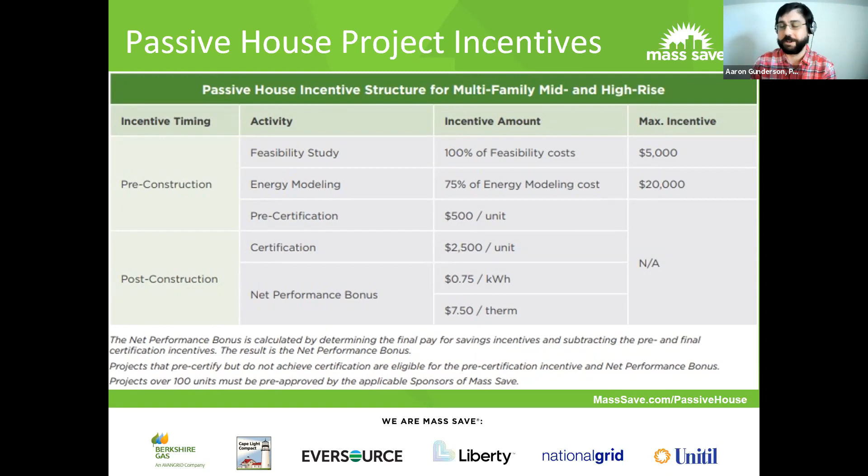We're really excited to see the growth in multifamily. The reality is a lot of these multifamily units are also affordable projects. That's where we've seen a lot of this growth, so it's not just market rate — we're seeing a lot of affordable projects go through this as well.

In addition to these incentives through Mass Save, there's been a lot of other movement with Passive House around the state. I want to highlight a few things of where we're seeing Passive House show up. The first one is at the state level through their affordable housing financing — I'll actually mention this on a separate slide, so I'll skip over that for a moment.

On the local level, we've seen a few different cities incorporate this. Boston has included Passive House in their new design standards — the Department of Neighborhood Development has included it as a method for large buildings to meet their zero emission building standards. Somerville is including it in a zoning ordinance, so Passive House actually qualifies for density bonuses in some areas of the city. Cambridge included it in a zoning ordinance as well, as an alternative pathway.

In Newton, we've seen it involved in a few ways. Their climate action plan at the town level incorporated it, and we've seen a local community group really push it. We've also seen large market rate projects like Northland, which is going to include some affordable units as well, really get excited about this and go for Passive House, in large part because of the way the city's been pushing it.

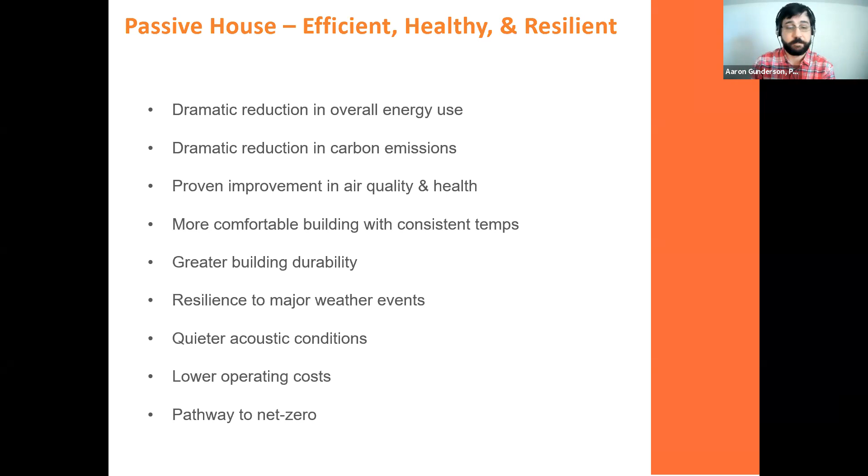This leads into what Passive House Massachusetts is working on right now. Over this year, we've been focused on a campaign promoting Passive House plus renewables equals net zero energy. This is all around framing the work the state's doing to develop this net zero code, to make sure we understand that we can't simply get to net zero with renewables alone. We don't have enough space for all the renewable energy it takes for typical buildings to become net zero. So by focusing on Passive House, by focusing on that energy reduction first that Passive House achieves, it allows us to get to that net zero energy that's so critical for the state's climate goals.

We're focusing on this at our monthly presentations. Many of you have been to them. They're the second Tuesday of every month. Our next one is coming up in July, and it'll also keep building on this theme. So feel free to keep attending those.

Lastly, I want to hit on a little bit of cost. I want to give a shout out to Beverly Craig from MassCEC, who just sent me this slide before the presentation, so thank you, and I was able to include it. This is going over Philadelphia, in Pennsylvania, where they have that QAP process, and they had this huge growth in passive house building.

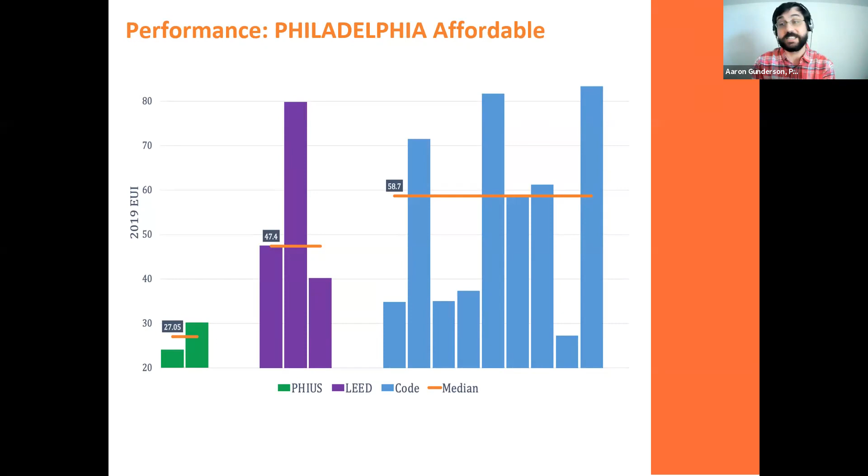We're able to see it actually happen. Many of you have seen the cost slides from these projects in Philadelphia and Pennsylvania, where the costs are about even, if not 1 to 2% more for the affordable projects, but really close to being even. And we're seeing that shape out to be, not even in performance, but a huge reduction in passive house for performance. So this is fantastic. This is what we want to see in Massachusetts, and why this presentation, all of you here, is so critical.

Lastly, I'll mention our video library, where we have a lot of great content. One of those sessions you may want to watch is this Affordable Housing Design Manual done by Tim McDonald from Onion Flats, who was responsible for a lot of those Philadelphia projects we just saw the cost and performance comparison of. So check out this session and a lot of others on our video library to get more information after today. But that's all I have.

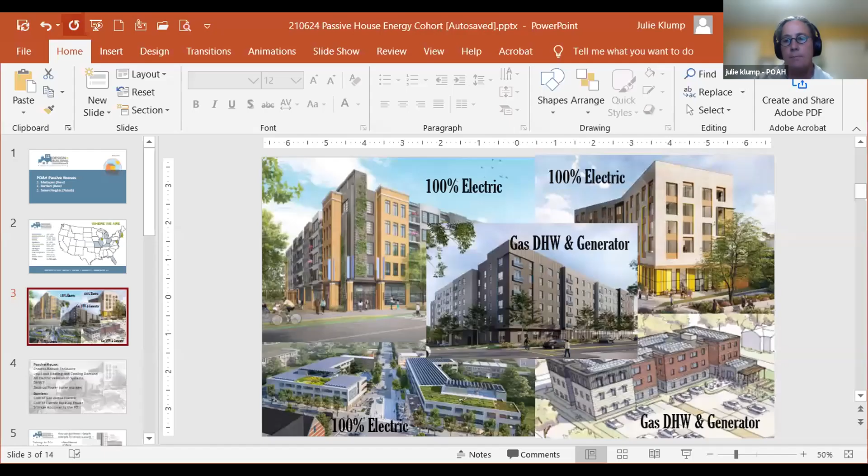Hi, everybody. Nice to be here, coming to you live from West Texas. It's almost 100 degrees out there. I don't know what it is there, but nice and toasty here.

I could talk about passive house all day. It just seems like the obvious way to build now that we've figured it out. I want to touch on how we finally got in the ground with the project, and highlight how we're keeping up with things as we're starting construction. Michelle's going to touch on a little bit of that in construction. Bartlett, I want to highlight, is our first shot at being all electric, with some challenges we're facing with one of the systems we're trying to put in place there. And then Salem Heights, which is a near passive house deep energy retrofit. I want to highlight some of this, and hopefully it's a little inspiration, and maybe it'll kick off some good dialogue about what folks are thinking about in passive house.

You might have to click on my slides. Yeah, you might have to click on your slide again. Like, actually. There we go. Mouse. There we go.

So I know we're talking about Massachusetts. I just want to throw out there, this is where POAH has projects. The green states have passive house buildings. In Massachusetts alone, we have the project I'm going to touch on briefly under construction. We have 2 starting this summer, committed to passive house, and then we have 2 starting design. So we'll have 5 projects underway in the next year or so in Massachusetts.

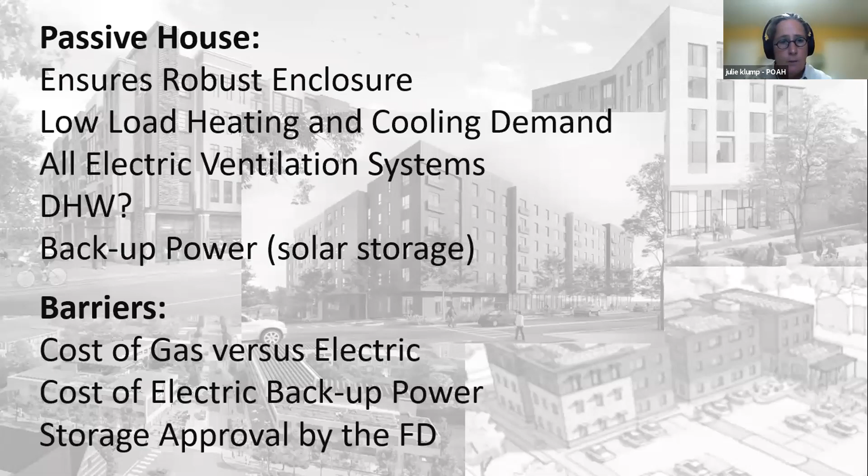So the way that we got to being in the ground on a project, we took it really slow and felt like what we needed to do was to really spend a lot of time. We brought a GC on early for pre-construction. We did enclosure training, estimating training, mechanical training. And this was not only for engineers and architects, because not everybody is up to speed as maybe Icon in terms of designing these buildings, but there are things we had to demystify. So the mechanical subs, they see per floor ERVs, and it's not something they're used to.

So the cost goes up $1 million. And then when we explain to them that we've gotten rid of all the vertical shafts and shrunk the ductwork because it doesn't have to travel as far, then it goes back down $1 million. So there were just some real key points during our training that we could really see.

And we spent a lot of time looking at numbers and pricing different things. What came of all that training was that we just needed to explain to people what we were doing, that it was still an enclosure, still a window. The training also highlighted things that made building the building better and easier, even though the sequence changed—that's been one of the big lessons for us starting construction, having to do things in a little bit different sequence, which is only just a learning exercise for the GC.

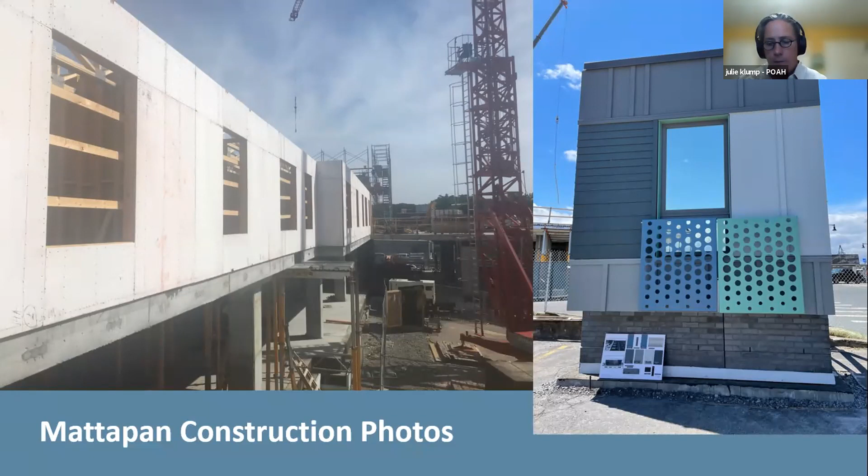So this project is one that should start this summer. It's 55 units, senior-ish, 55 plus—which makes me feel kind of old—and it's all electric. It's our first shot at all electric in Boston.

We've got a fantastic design for solar storage backup. We've got a 90 kW PV array. The other thing is we need probably 150, maybe 160 kW of production, so we're going to be short. We're going to research how to use some offsite capacity in order to bring this building to net zero. We haven't gotten into those details yet.

We don't know if that's something we'll be able to afford to do, but at least we know that if we can get to all electric, it'll help our decarbonization strategies and also give us a real model for the best way to buy offsite in order to fill that gap. The interesting thing is when we were all gung-ho about our solar storage system...

Our construction person sent an email—because we had our building permit submitted to the city—saying we wanted to bring this up, that we'd really like to do this instead of the fossil fuel generator. And her phone started ringing off the wall. She finally took a call, and she couldn't keep up with the notes and all the concerns.

A lot of these concerns are valid, but unfortunately a lot of them were based on a video on YouTube that showed some battery burning, and I don't know if it caused a lot of damage. Anyway, these are some of their concerns, and you can see it has a lot to do with safety. The image of the battery within this container—it actually has its own fire protection system. So there are a lot of ways we're going to be able to allay their concerns.

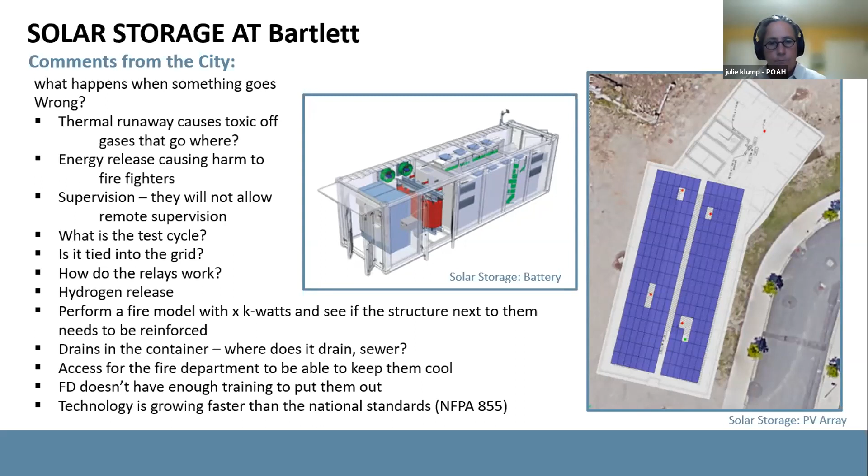And then this is a retrofit that we're doing. This is 2 10-story towers. It'll be 283 units. We're going to take over a couple units and do some better amenity space. This is Icon working with us on this.

Initially, we thought we were going to reattach all this brick that, when it was built in the early 70s, code allowed to be supported from the ground up on itself. So there's no relieving angles, no control joints. When we started to dig in and do some openings in the brick, we realized the brick ties, the very infrequent ones tying it back to the structure, were galvanized and not installed at all. So we had to take the brick down, which is fortunate for the design and building performance team at POAH, because we get a chance to really beef up this enclosure.

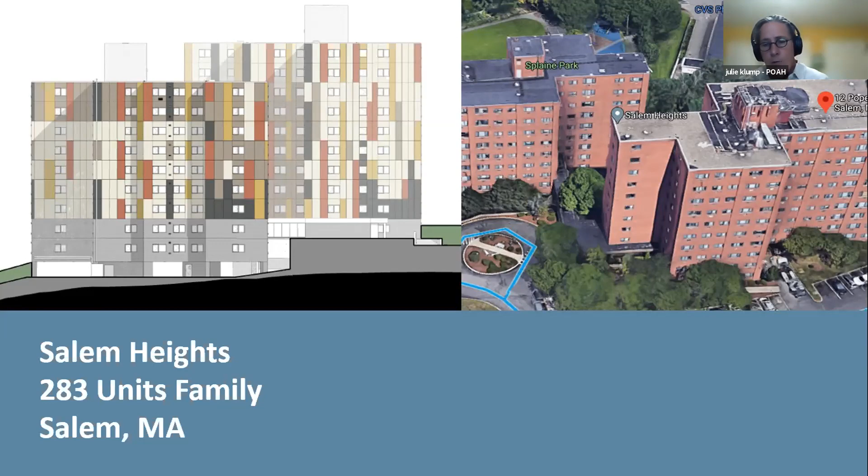So the brick's coming off. You can see on the far right, that's the existing enclosure. It's a metal stud wall with bad insulation, sheathing, and brick attached or not.

In the middle, we're using Armorwall, which is a structural insulated panel, not unlike ZIP, but it has all the fire ratings we need for a high rise. It also allows for a thermally broken cladding attachment, and we're going to use metal cladding on this building. We're buying a really good window, and we're putting 6 inches of insulation on the roof. So excited about this one.

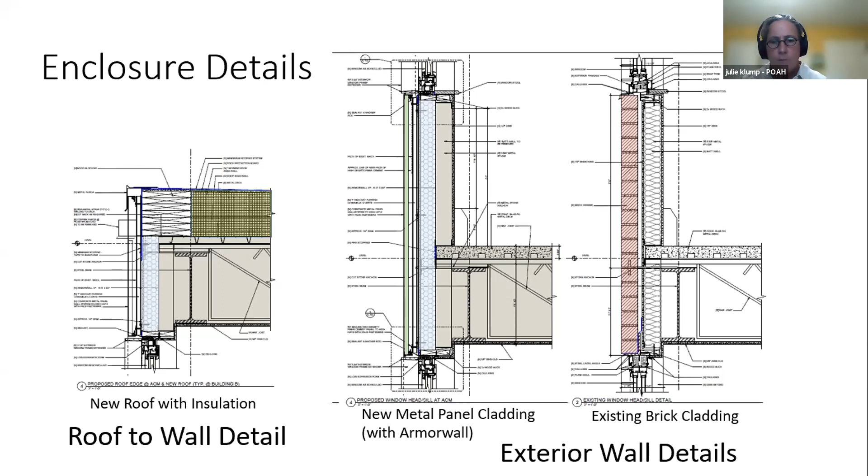Struggling right now with trying to figure out how to do blower door tests. We have some ideas on doing 3 floors, so we can really isolate a floor. That gets us maybe 50 units. But it's about how do we balance the incentives we think we should get to help offset a very expensive project, but very worthwhile in terms of getting this project up to speed in energy efficiency and good indoor air quality.

And then the air conditioning and ventilation - currently the ventilation system was a rooftop unit that dumped air into a plenum, and likely just made a very fresh air plenum, and very rarely did it drop through a register in front of the door into each unit. It was designed that way because there's a lot of giant steel beams that block the areas where you might push ductwork to provide fresh air.

So we're taking the leap here on the Minotair system. It's HVAC in a box - there's no outside condenser. This was a lot of work by the Icon team helping us figure out putting this closet against the exterior wall, running ductwork into the unit for fresh air, and also into the unit to exhaust kitchen and bath. There's ductwork on the exterior of the building, high and low, that will exhaust and bring fresh air into this Minotair system. The units had through-wall AC, so we've been able to get rid of all the through-wall AC units. So our enclosure is that much better.

We put one of these in our management office, which was a former unit, and the management staff couldn't believe how nice and fresh the air was. They said the unit - because we didn't even put it in a closet - was so quiet, so easy to use in terms of controls, and they really felt a real difference in air quality. So we're excited about that.

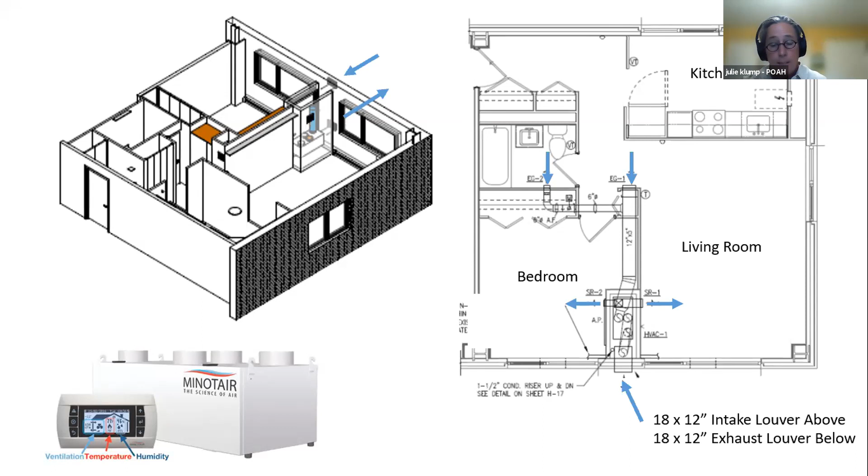And then this has me kind of excited. This is a wall mounted PV array. On the southwest elevations, which step back and forward, we have a design for a wall mounted PV array that should get us 106 kW production.

We do have some roof - this is in our base building. If we can have some contingency left over at the end, we'll cover the roof as well. It's probably not going to touch the total demand for electricity, but it sure is going to make a dent. So we're excited about this project. I think it's going to make a real difference for the residents there and for energy costs. And we'll be able to decommission our cogen, which is a real fossil fuel burner, all for the right reasons, but not necessarily the way we want to heat and cool our buildings.

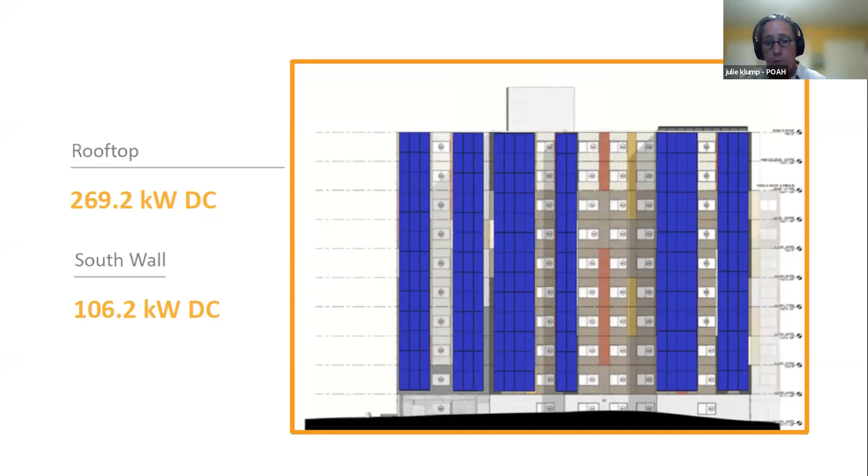So how close are we to passive house? We'll have to see in terms of what kind of air tightness we achieve. We have some real high goals here. So we will hopefully be able to present this project, at least half of it, in a year or so, because we're going to do tower by tower. So that's all I have. I look forward to any questions or conversations about it.

Thank you so much, Julie. And also, we do have one question: is there a reason the roofs are flat? Tell us more - is that a solar consideration?

The roof's flat, and it's interesting. This is not a roof that would support solar, so we're going to actually have to reinforce the roof. There's steel trusses, and it's actually the wall. Attaching to the wall structurally is easier than it is to the roof, which sounds crazy, but it's just because of the design of the roof—it was not intended to support anything other than the weight of a membrane. So the roofs have always been flat, and we're just going to really beef them up with insulation.

And for the other ones that you're designing, do you usually do a flat roof design? The Bartlett and the Mattapan project, is that also for solar consideration? Not necessarily for solar. It's just that we don't need attic space for equipment, and it does create a nice plane for solar.

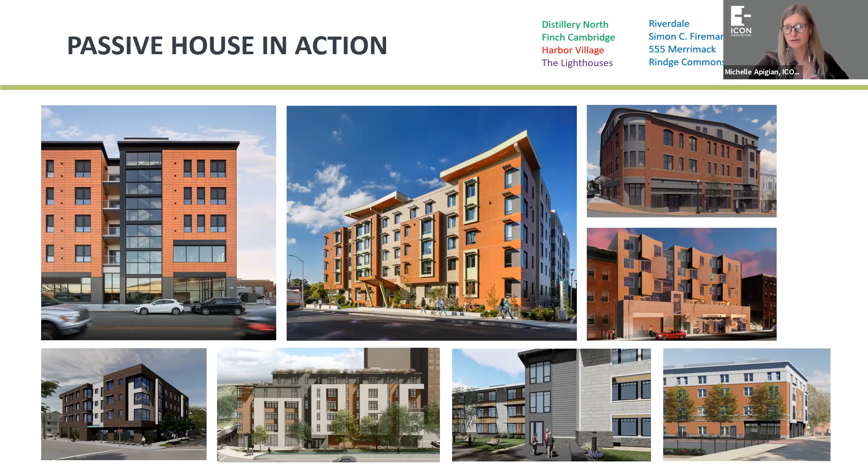And at this point, almost a dozen in the queue, and that is supremely exciting. I would have never been able to predict that a couple of years ago. Aaron has touched on this, but it's worth reiterating that part of the reason is because some really smart people put a few incentives into place to help ultimately jumpstart what is now, I think, a movement.

So it's worth noting that the 2015 IECC that Massachusetts adopted did actually include Passive House as an alternative compliance path. That was big, that was big news back then. Didn't move the needle at all, but it was still important.

And then what really jump-started things—thank you again, Beverly Craig and the Mass CEC—was the Passive House design incentives, which were really targeted specifically to affordable housing. Eight projects, I believe, were selected and are all either under construction or just about to be. And what that demonstrated for a lot of people who were very keenly interested, but just didn't believe it, was that we could do this. We could do this affordably. We could do it close to cost parity, and the benefits were actually supremely real, and we're getting data from that, and that will be ongoing.

But that gave inspiration for ultimately the Mass Save incentives that Aaron spent a good deal of time talking about, and of course now there's the net zero code underway and a lot of other advocacy at all the local levels. All of that matters because there is no possible way we would have the pipeline we have right now, particularly from the market, if we did not have that advocacy going on. So please go out, show up, and let them know that this is real and this is what we need.

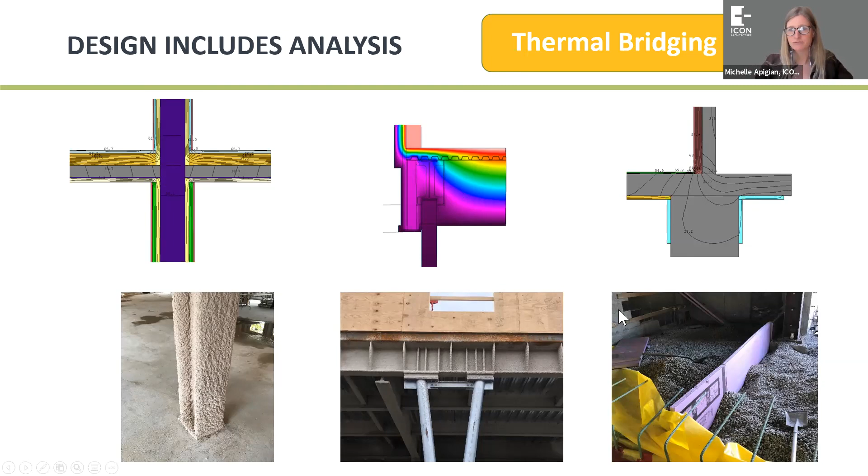So we've taken it on ourselves to do these dew point analyses. Each of these conditions at the top here reflects what was happening in real life in our design, and we wanted to test it because we were worried about it and address it accordingly.

The same is very true for shading. At Finch Cambridge, we started with the assumption—and I want to say, Julie, absolutely, when we can bring a GC on early to help evaluate, price, and iterate, it's super important—so we had the benefit of having NEI on board during early design, and we were assuming we needed to shade every facade.

The building has a very unfortunate orientation, largely east-west, and I was really concerned about overheating on those two facades.

Ultimately, our analysis through modeling showed that adding shading on the east and west did not help us. Yes, it helped overheating, but it didn't actually help—it hurt us in the wintertime. So it was energy negative, basically energy nothing. We were therefore able to value-engineer that out during schematic design because it wasn't appropriate. It didn't make sense. We could never have done that if we didn't have someone helping us test the values and do the modeling.

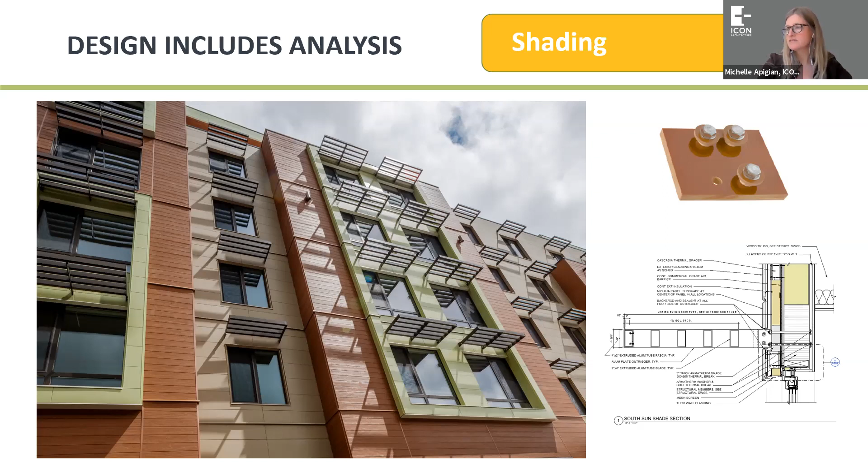Most of what I want to talk about is communication, which is fundamental to our industry. There are a lot of different ways we do that. I'll start with the work we're trying to do in our drawings, but also how we think about who's overseeing things in the field, who's responsible for making sure this piece of the equation is consistent and covered, how we deal with reality which we didn't anticipate sometimes, and how we all try to make sure we're speaking the same language.

One first question that often comes up is: where's the boundary? What's your pressurized envelope? Where's the passive house boundary? At the distillery, we decided, for reasons I won't dig into, to exclude the stairs and elevator cores from our passive house boundary. So in our drawings, we thought, okay, non-passive house is cool gray—you can see it shaded, and those are obviously outside the passive house boundary. Yes, that was true, but those boundaries were supremely complicated.

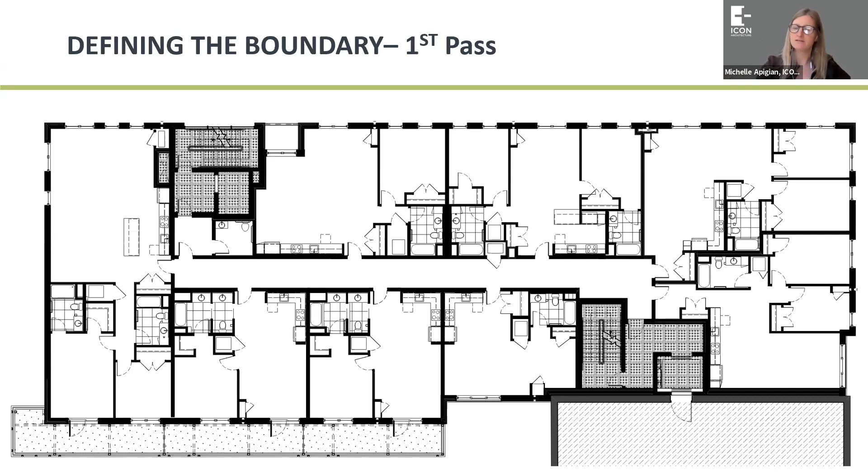When we got to Finch, we decided we needed to do more, and that color was appropriate. In a world where digital drawings are a reality for most, and people are walking around with iPads in the field, it isn't a big printing issue—you might have to print a couple of drawings in a set in color, but otherwise it's super helpful to add color and use it to distinguish where it's a compartmentalization component versus a thermal envelope component.

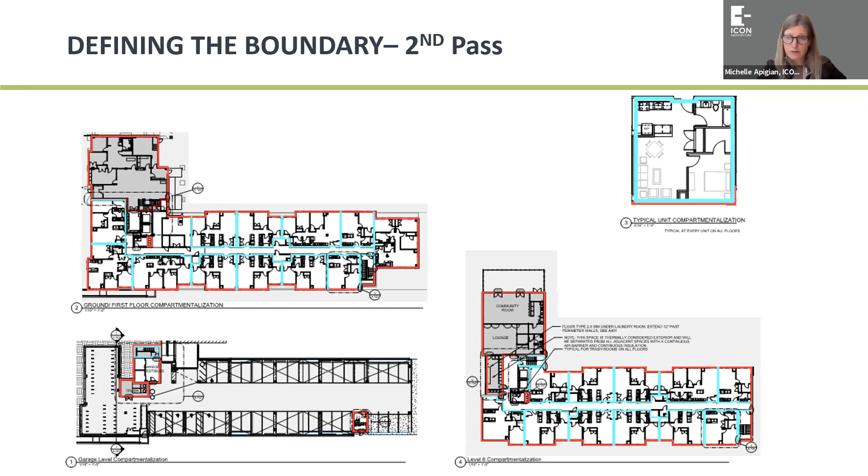You also have to walk through the transitions when these boundaries are not clean four square walls on the outside of the building, which very often is just not the case. Don't get me wrong, that simplicity helps, but it's not always easy to make those decisions.

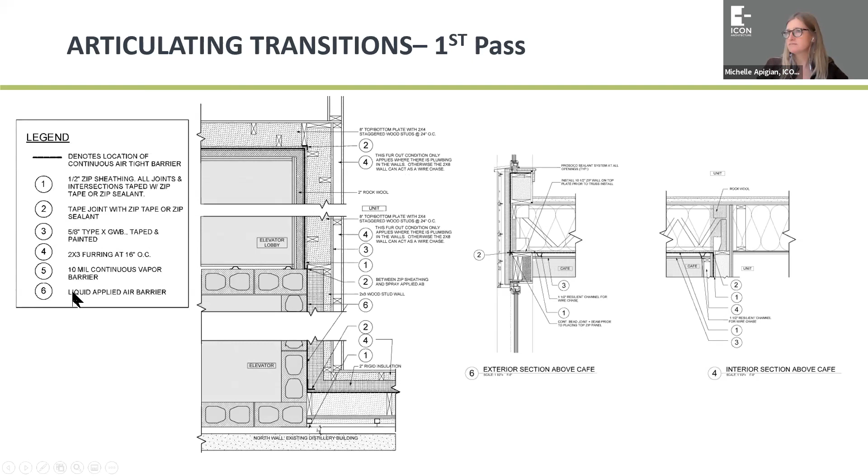At the distillery, we had these plan and section elevations, and we identified different elements and tried to show them in a legend, and it wasn't bad.

When we got to Finch, we decided again we're using color now, and we're not just going to tell you what products—we were beyond explicit here. I wouldn't actually recommend going this far, but this was necessary for this project. We also actually listed sequence. We began to actually think about sequence.

First, we expect this will happen. If that doesn't happen first, we will not be able to make continuity, so it has to happen first. By even putting it out there, we give the builder an opportunity to say, wait a minute, that can't happen first—I've got this guy coming in and he's got to do that first. And then we can rethink it. If we've said this is the sequence we need, then we can have a conversation. But you do actually need to think about some things to that degree if you want to get it executed properly.

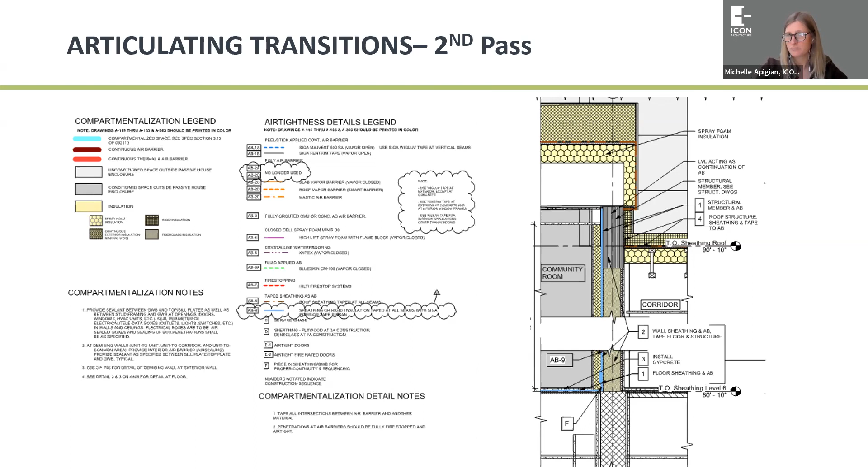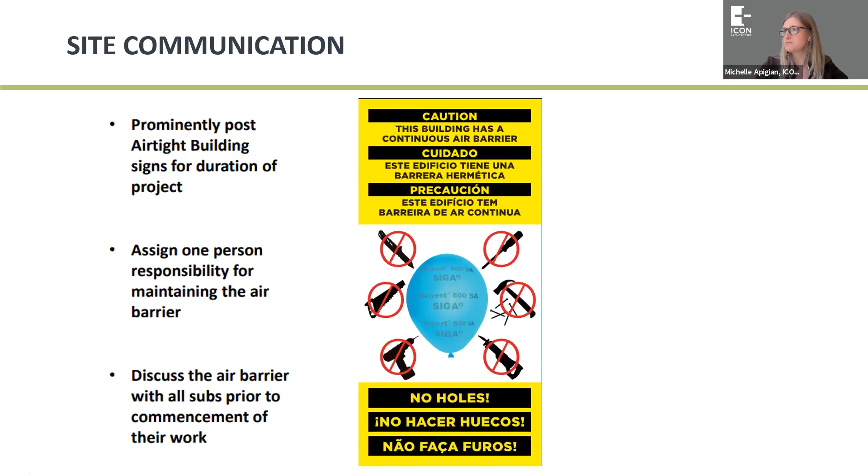So I think that's my key takeaway. The signage was probably just made me feel good. Sometimes it's impossible to even visualize until it's built in real life, and after the fact we're trying to figure out how to put things together, in what order, to make the continuities that we need.

You can always use a photograph, you can always mark it up. And again, what's the order? What's the order of operations? That is so often what's critical in a passive house project.

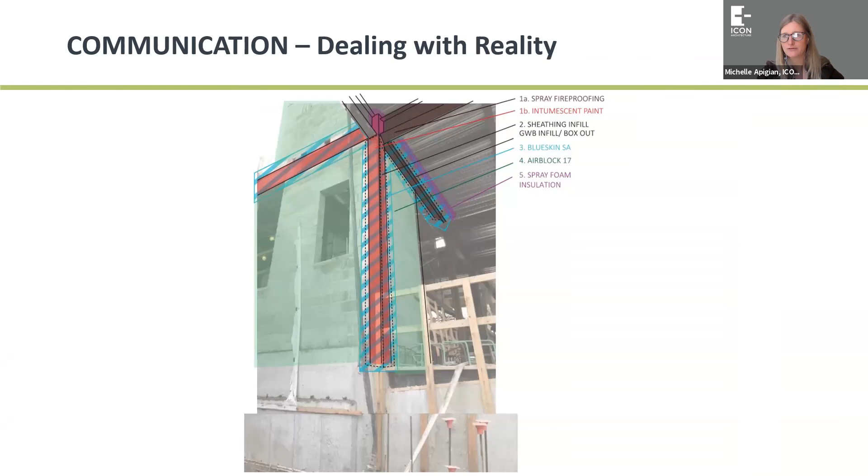And now, having in hindsight been doing a lot of that, which is not a place we really want to be—we don't want to be taking photographs of real things and trying to figure it out in the moment. We want to be ahead of it.

So we've begun trying to speak the same language, which is to look at the three-week look-ahead and identify anything that's going to touch one of the key transitions or elements to our passive house enclosure or systems, and ensuring that we have a chance to talk through the sequence with all the trades that are relevant on the call. Sometimes it's a half-hour call. We've been doing them every other week.

And it's amazing how often someone says, wait a minute, I have to get in there first. And we're like, oh shoot, we didn't anticipate that. So we have to quickly rethink, but at least we're rethinking before we've set it into stone. We're not trying to solve a problem—we can actually prevent a problem.

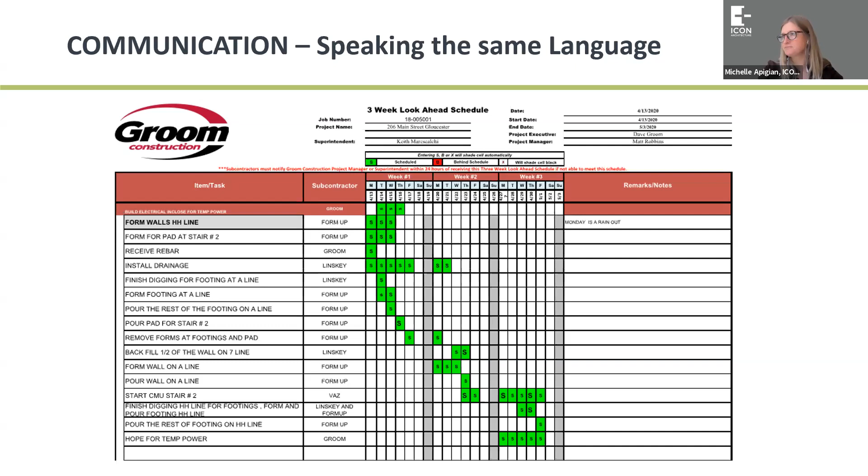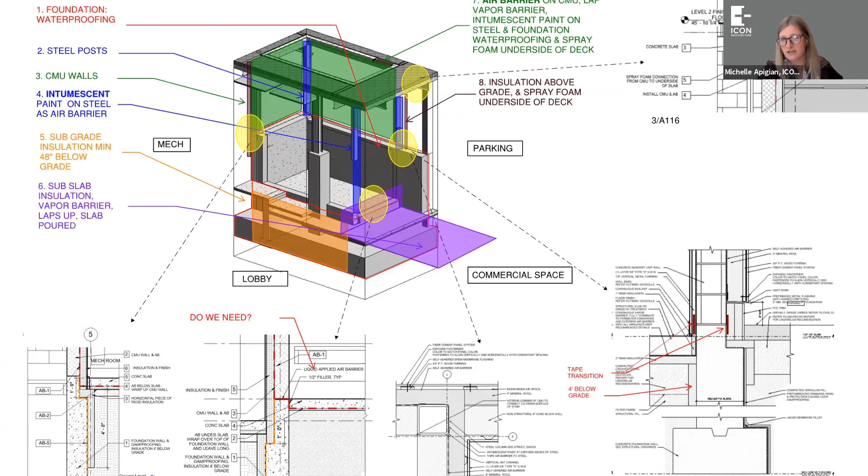So we have been really articulating what's coming next that matters to us passive house wise. Here are the details that we had in our set, now in axonometric, and here, by the way, now is how we expect it to roll out—here is the order of operations. And if all the right trades are on the call, I guarantee in half an hour or an hour you have solved this problem. You know that it can be done or not, and if it can't, you've got other options in the queue.

Craft. Building is a trade and it's a beautiful thing, and we have long given it a disservice by failing to respect how valuable it is. Every aspect of the trades matters in a passive house, and everyone has a role to play. You don't need to overplay it—you just need to help encourage them to do their job awesome, because it means a lot to you and to the project. So certainly the carpenters were fundamental.

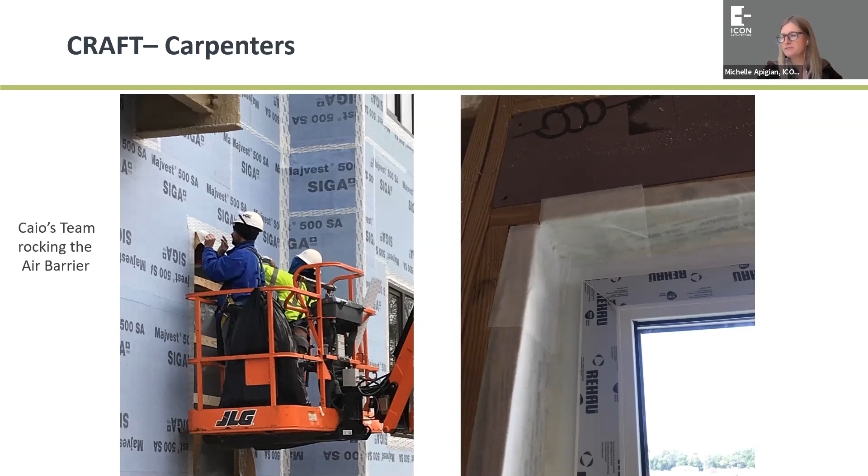And we had like an all-star team that had never done this before. And boy, did they rock it. And it was super exciting.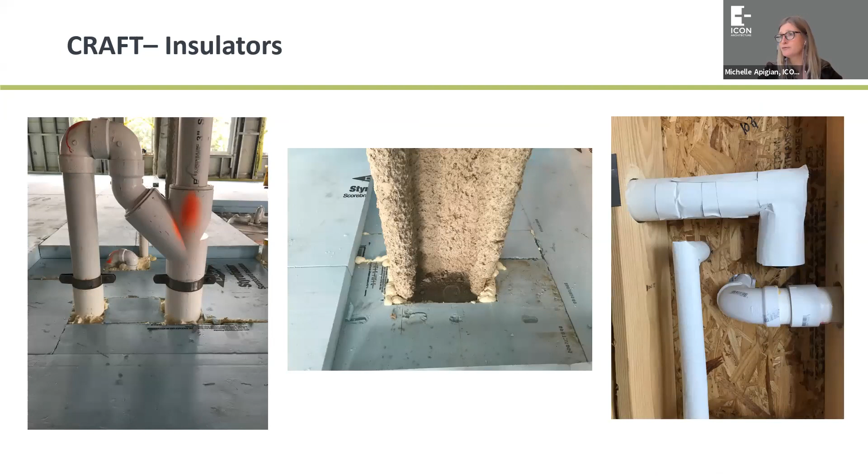But insulation is a big deal too, and that's a totally different crew. There are lots of different versions of where insulation needed to happen. The plumbers are tied to that because all those penetrations need to be addressed and need to be airtight. You can see that we had to practice and figure out how to get it right.

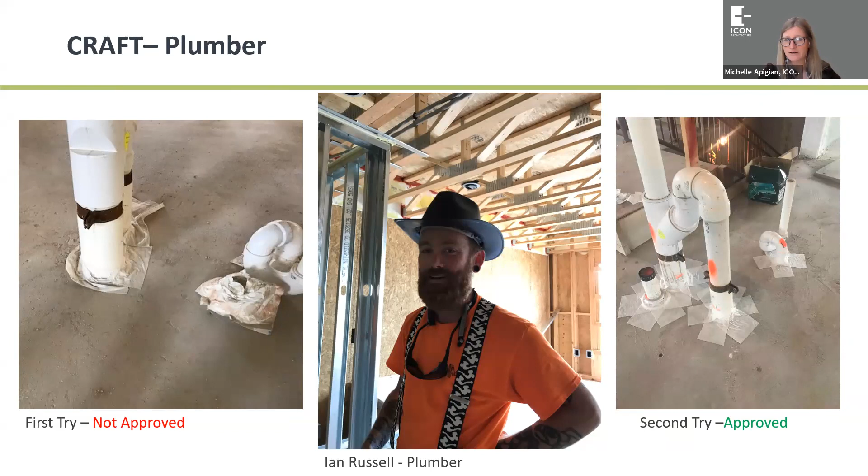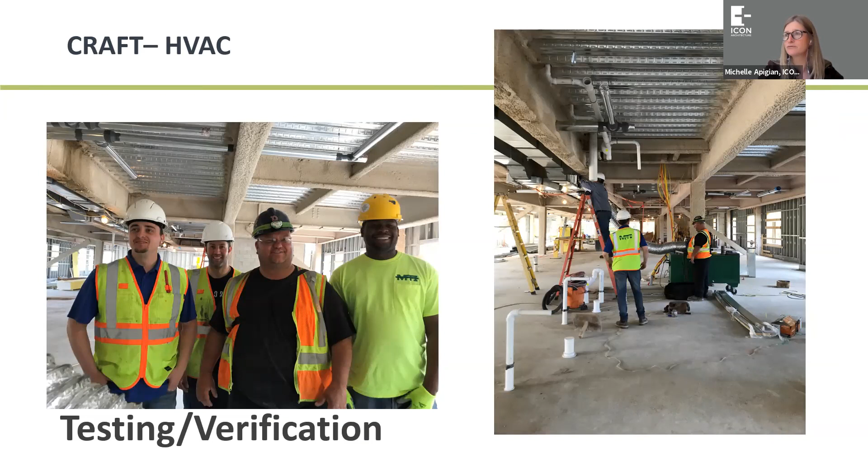And ultimately, ductwork is super critical because ventilation is so important, especially, as Julie was saying, individual versus a central system. Central systems have a lot of runs going horizontally and vertically, and balancing all that is tricky. So we need to be able to evaluate that and ensure that they know that we care very much about an airtight system.

And then there's the electricians. Sometimes it's a different crew working on the outside than on the inside, and they didn't get the memo that, oh yeah, we don't need to cut the hole like an inch bigger than the outlet.

And finally, not to discount, and this is a place where too many projects don't have this oversight, this testing and this verification along the way, because there are just a lot of things that accidentally don't get done right. No one meant to do it wrong, but if we don't test and verify, we don't know. And that can be from an airtightness perspective, that can be from an insulation perspective, and then of course, just systems are working the way you planned.

So that could be infrared, that could be visual analysis, blower door testing, but it's all very helpful. QA/QC really matters, and that's one of the things I love about the PHIUS setup in particular.

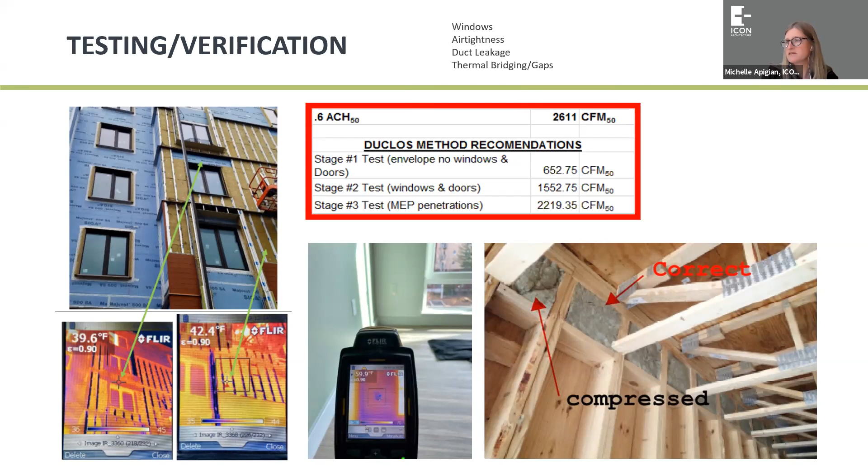And with that, I will try to find my Zoom so I can start my share. Yeah.